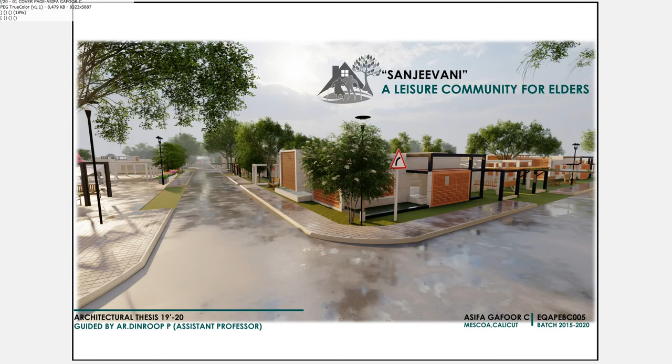Hi, this is Asifa Gafoor C. Here, I would like to present my thesis topic, Sanjeevani, a leisure community for elders.

This is basically a retirement community, which is away from the concrete jungles of the city. Sanjeevani has been specially crafted for the retirees to live an active, healthy life in the lap of nature and to explore the things which they couldn't do during their work life. Basically, this is considered as a second home for senior citizens who believe in living their golden years to the fullest.

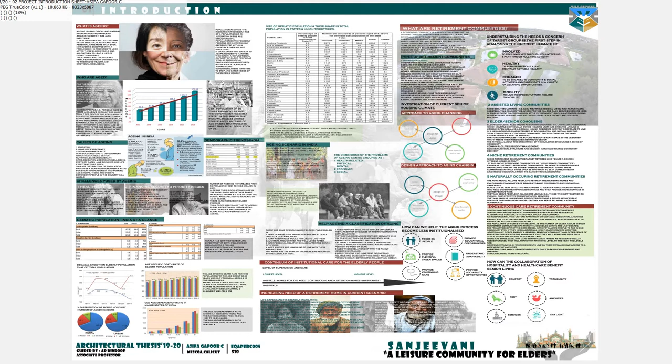Talking about the feasibility side of the project and why I have selected retirement communities as my topic. Since there is a hike of geriatric population in India, if we are checking the past 10 years population census, we can see that there is actually a high rise of geriatric population every year due to many reasons like high life expectancy ratio, the old age dependency ratio, and of course highly sophisticated medical facilities.

There are different types of retirement communities. Here, I intended to design a continuous care retirement community, which actually clubs independent living, assisted living, as well as 24-hour nursing home care.

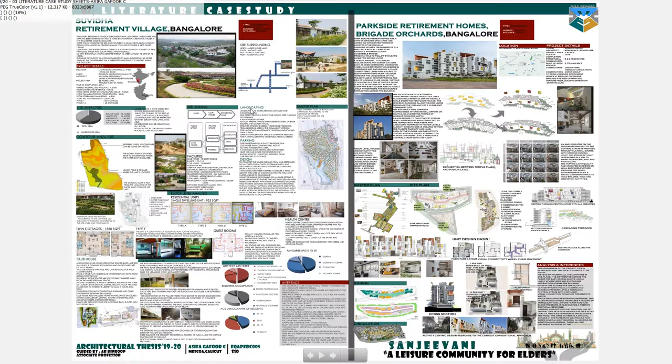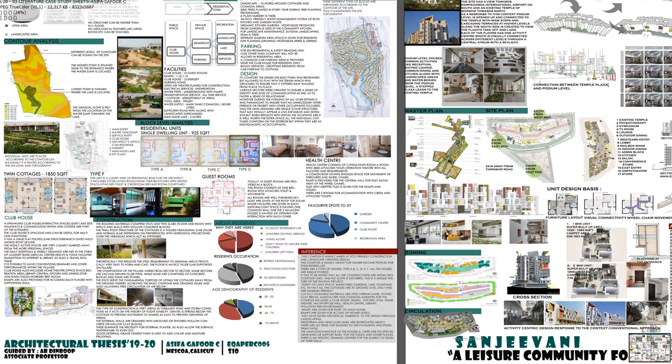Study part, I did 4 different case studies, 2 different literature case studies and 2 different live cases. Literature case studies being the Suvidha Retirement Village, which is situated at Bangalore, which covers an area of 27 acres. The complex is mainly aimed at eco-friendly construction and landscape-oriented design, in which all the individual units are placed according to the site contour levels.

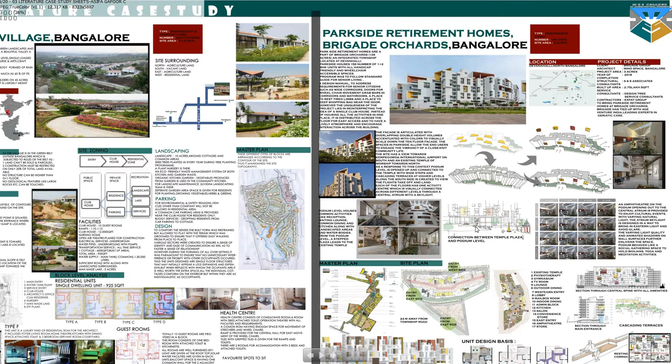The second being the Parkside Retirement Homes, which is again situated at Bangalore, which covers an area of 3 acres with a built-up area of 2.75 lakh square feet. The uniqueness of the project lies in reinterpreting the idea of a single clubhouse instead of housing all the activities in one place.

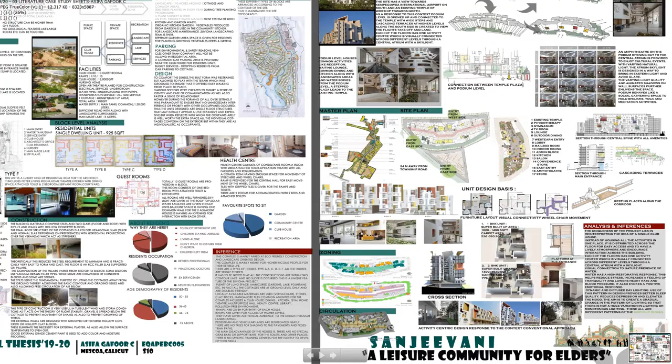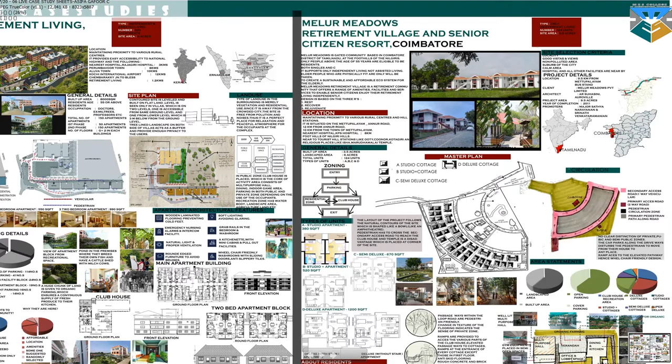The live case studies include the Blessed Retirement Living, which is situated at Aluva, Ernakulam, which covers an area of 3 acres, and Melur Meadows Retirement Village and Senior Citizen Resort, which is situated at Mettupalayam, Coimbatore, which covers an area of 9.5 acres.

I used this opportunity of doing live case studies for understanding some of the basic elements, which include the area requirements of the project, the proper zoning, the study of interaction spaces of residents, the evolved spaces, activity study of residents, the connection and the accessibilities, the residents' attitude towards space, the needs and aspirations of residents, etc.

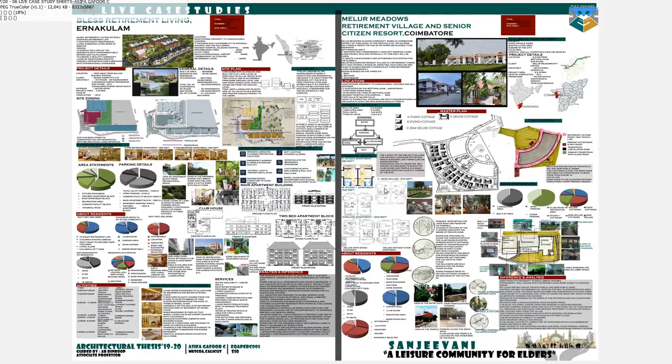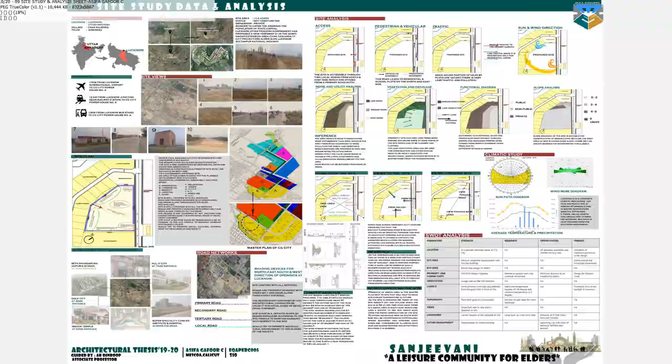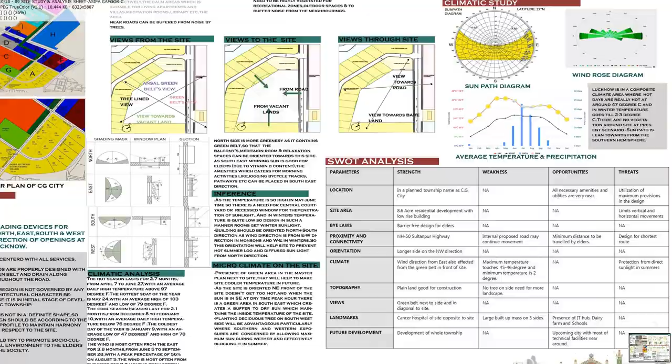Analysis. My site is at Lucknow, Uttar Pradesh. To be more precise, it is at Gomti Extension area. It is actually a part of township Chak Ganjaria C.G. City, which covers an area of 13.6 acres. Talking about the Lucknow climate, Lucknow lies in a composite climate area, which has a subtropical climate and faces extreme climate throughout the year.

Moving into design programming, space analysis, and design concept. Considering the end users being the elder people, a high density of older population is not good for cultivating personal attention and healthy social relationships, since old persons become more sensitive to be irritated by the negative status of others. Considering these factors, I have designed a retirement community for 120 elder people around Lucknow.

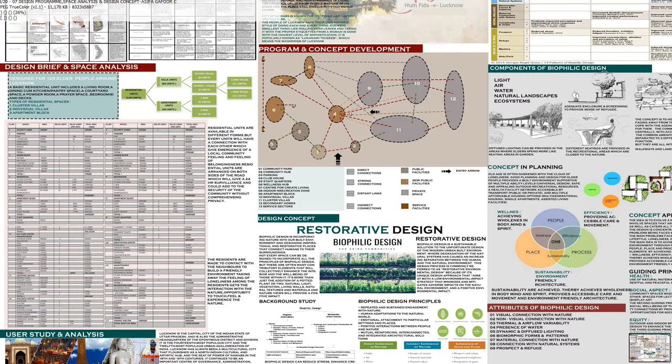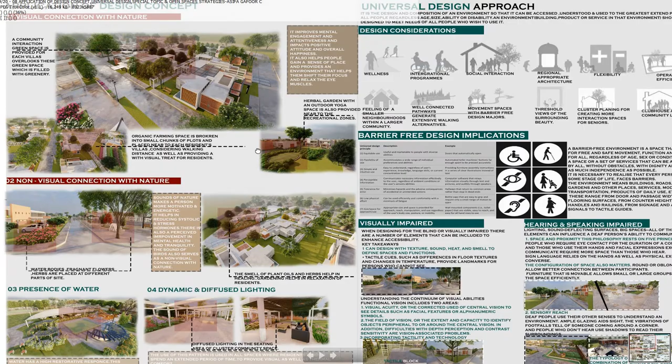Considering the psychological preference of the end users, I have divided the residential spaces into 3, namely cluster villas, individual villas, and apartment block. This is how I applied my biophilic design concept in my project, including visual connection with nature, non-visual connection with nature, connection with natural systems, prospect and refuge, bird free communities.

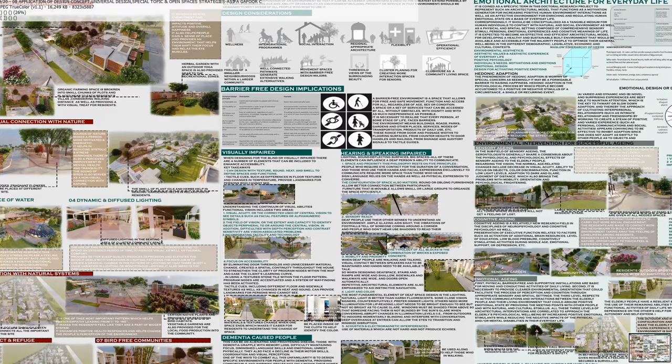My end users being elder people who are less able, my design should always be universally accepted design. So let's see how I have approached universal design and how I have included it in my project. I have also planned barrier-free design implications, which I mainly break down into 3 environments, including visual environment, hearing and speaking environment, and dementia caused people.

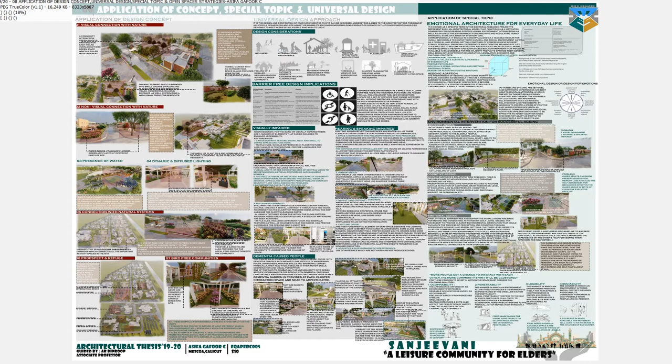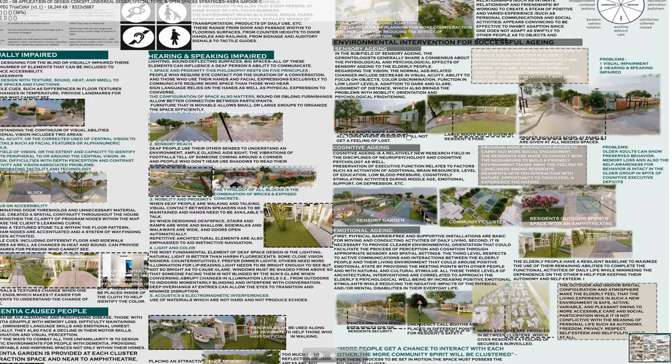Moving into application of special topic, which is emotional architecture for everyday life. It represents an architectural model that functions as a motivation generator for increasing positive human-environment interactions, as well as an effective environment for enriching and regulating human emotional state on the basis of everyday life.

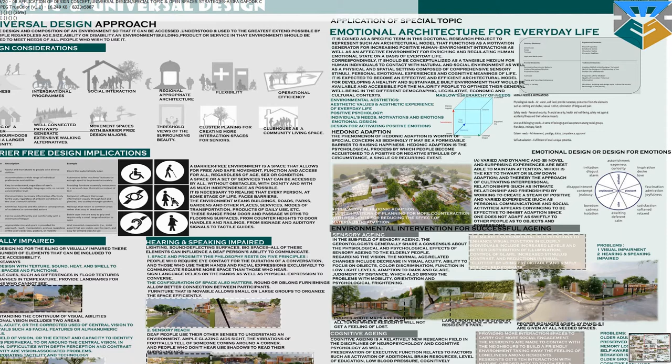Hedonic adaptation is the psychological process by which people become accustomed to a positive or negative stimulus of a circumstance, a single or recurring event. And here, there is a high chance of the elder people being subject to hedonic adaptation. The design should always be varied and dynamic. Moving into design of senior friendly spaces.

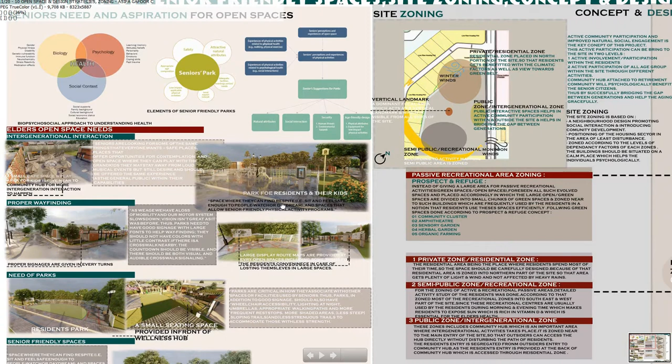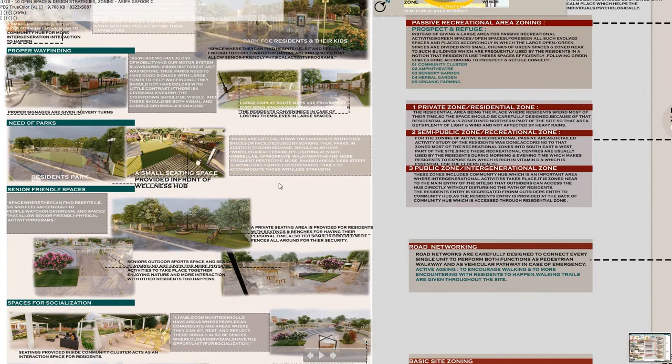People get emotional attachment to places other than their home, which are referred to as third spaces. Older adults are more likely than younger adults to have lived in a single space for a long period of time and consequently feel more attached. If parks and other open spaces are part of the third spaces for community elders, they can help them develop a positive connection to their surrounding environment and feel part of their community.

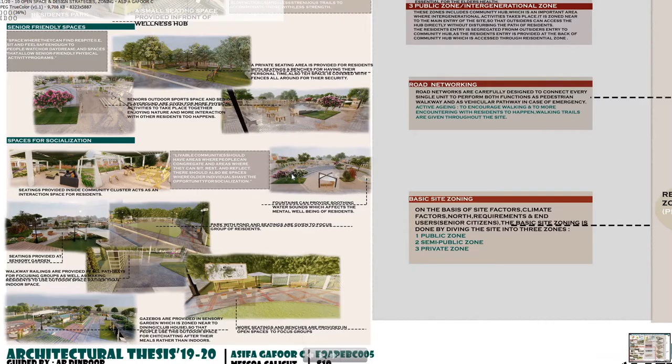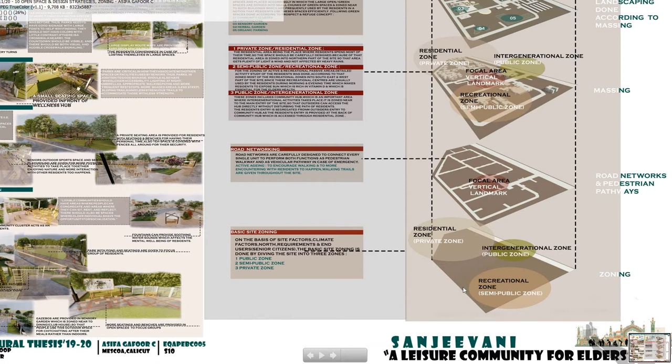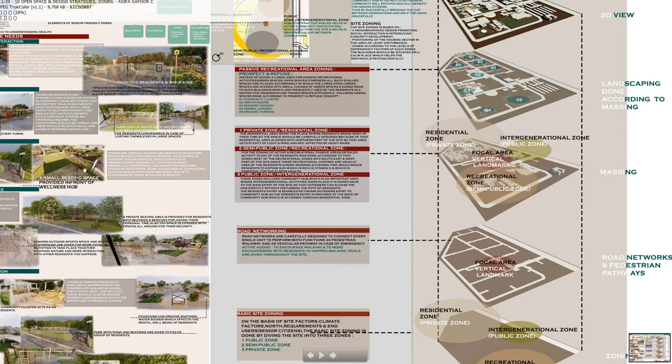The zoning is on the basis of site factors, climate factors, direction, requirements and end users. The basic site zoning is done by dividing the site into three zones: public zone, semi-public zone and private zone. Then all the road networks are carefully designed to connect every single unit to perform both functions, as pedestrian walkway and as vehicular pathway in case of emergencies. Then comes the detailed zoning.

The residential area is the place where the residents spend most of the time, so I have wanted it in such a way that the residents are benefited. So the residential area is zoned into the northern part of the site so that they get plenty of light and wind and are not affected by heavy rains.

After the residential area, the residents spend most of their time at active and recreational centers. So for the zoning of active and recreational areas, I have done a deep activity study of the residents. According to that, I zoned most of the recreational zones into the southeast and southwest part of the site, since recreational centers are usually used by the residents during morning and evening time, which exposes these residents to sun, which is rich in vitamin D and essential for the elders' health.

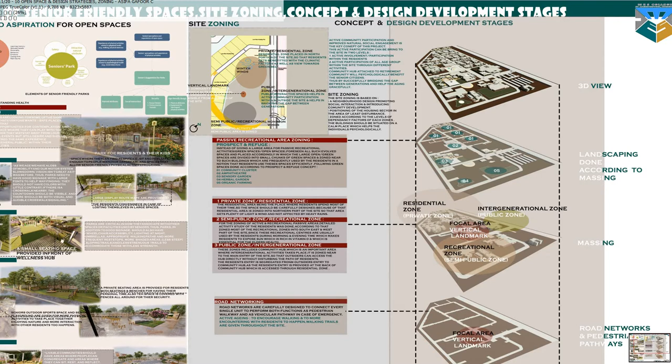The intergenerational center, including the community hub, is placed in the public zone, which is an important area where intergenerational activities take place. It is zoned near the main entry of the site, so that outsiders can access the hub directly without disturbing the path of residents. The vertical landmark in such a project is very important for the perceived security of less able people.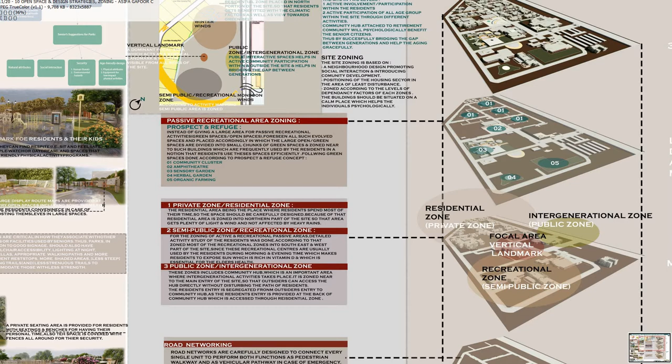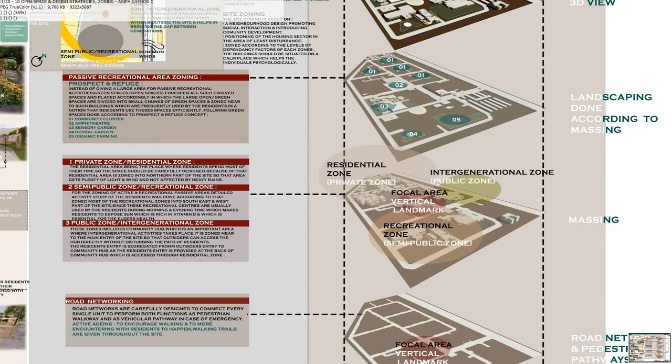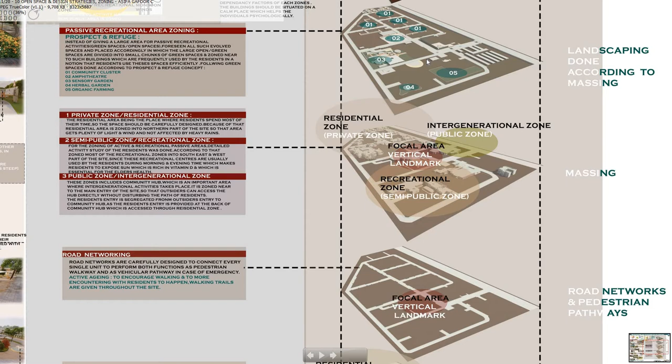Extensive care is taken while designing passive recreational activity spaces. Instead of giving a large area for passive recreation spaces, I have foreseen all such evolved spaces and placed them accordingly, in which the large open or green spaces are divided into small chunks of green spaces and zoned near buildings which are frequently used by the residents, so that the residents use this space efficiently.

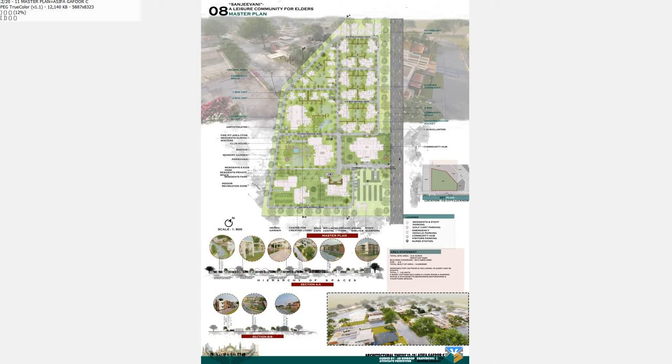Talking about spatial planning, my primary focus was to create more interaction spaces and more opportunities for residents to interact with each other, and to include ample green spaces so that they spend most of their time outdoors rather than sitting indoors. The site abuts the road on its northeast and northwest side. The main entry is through the northeast entrance. All the residential areas are zoned into the northeastern part of the site.

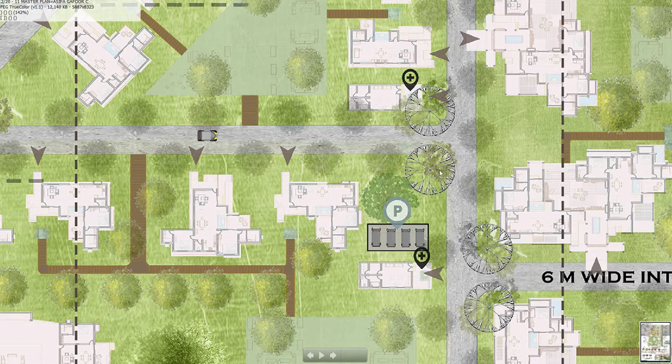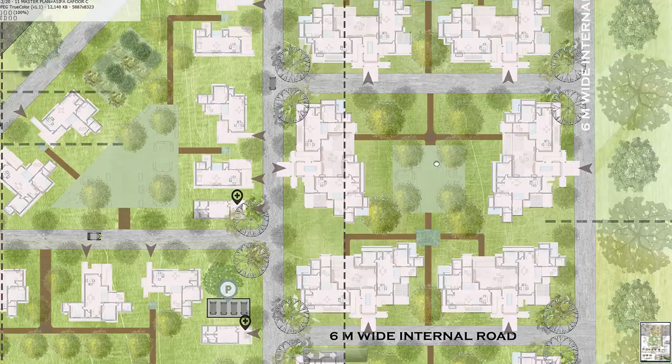These spaces include cluster community villas, individual villas, an apartment block, then a nurse station in between the villas for 24-hour surveillance of the residents, then electric vehicle parking areas, then a secondary home which is zoned at the end corner of the site. The secondary home is basically a place for residents' children to stay. All the residential areas are connected by community interaction spaces either at their center or nearby.

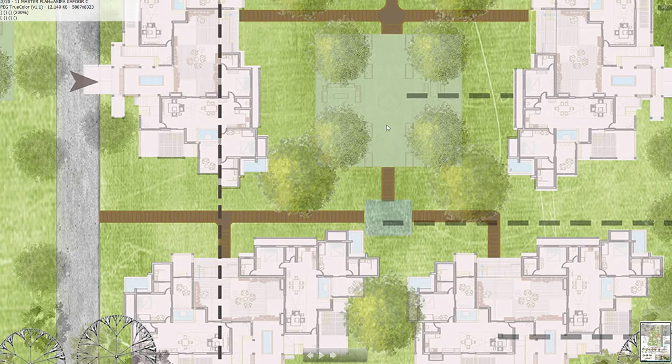Actually, a hierarchy of spaces takes place here. That is, two cluster villas are connected by a central deck space, which is connected by a green corridor space to a small neighborhood pocket space. This small neighborhood pocket space is connected by two green corridors of neighborhood cluster villas. Then it is further connected to a larger community space.

All large activity areas in the site are highly connected to each other, so that a person standing at one end of the activity space is visible to a person standing at the other end of the space, as visual surveillance is very important for both real and perceived security outdoors, especially for the less able.

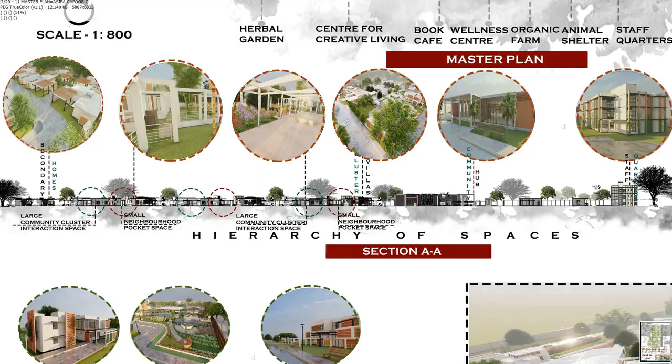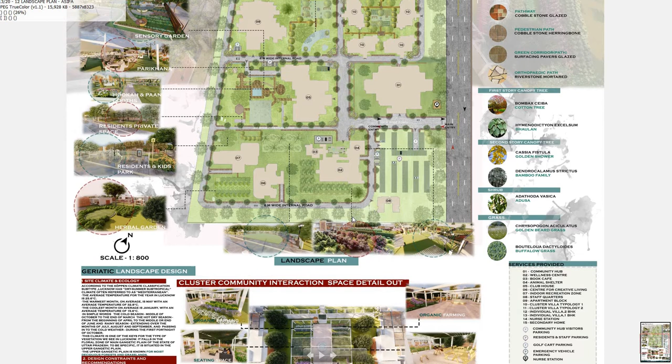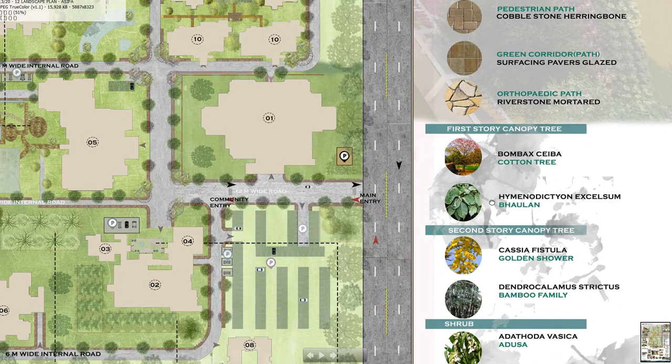Moving into Geriatric landscape design. According to the Köppen climate classification subtype, Lucknow has a dry summer subtropical climate referred to as Mediterranean. The climate is one of the keys for the type of vegetation which we see in Lucknow. It falls in the floral zone of the main Gangetic plain of UP, to be more specific, the upper Gangetic plain, which is known for its moist deciduous forests and grasslands. Considering the native ecology of Lucknow, I have gone for a landscape which is a mixture of woodland and grassland.

Talking about the services, on the basis of the water capacity, I have provided an overhead tank on the apartment block as well as a pillar water tank which is situated near the apartment block.

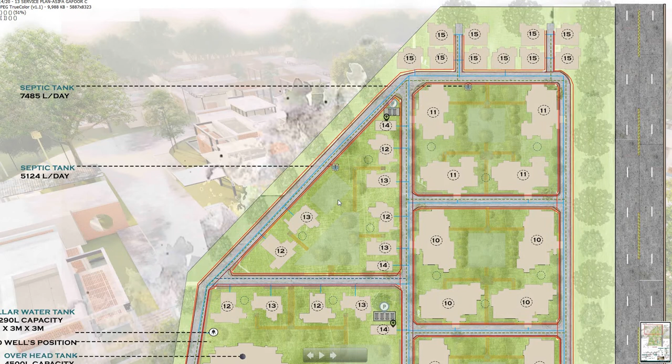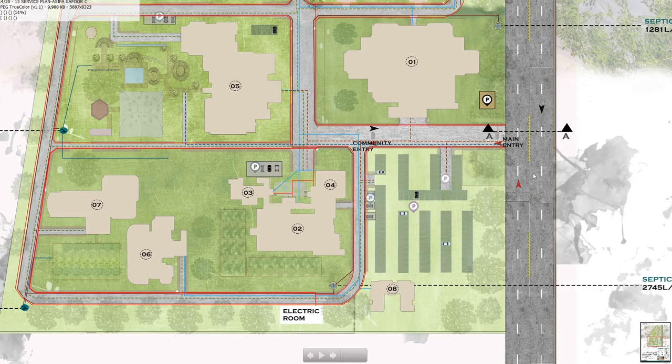On the basis of number of users as well as the capacity of the tanks, four different size septic tanks are provided in different parts of the site, which all are interlinked and then connected to the sewage treatment plant. STPs are then connected to the outer drainage, in which the natural slope of the site is towards the northeast side. If I'm taking a section like this, this is how I'm planning to take all my cables through into the site. These are the design of prototypes.

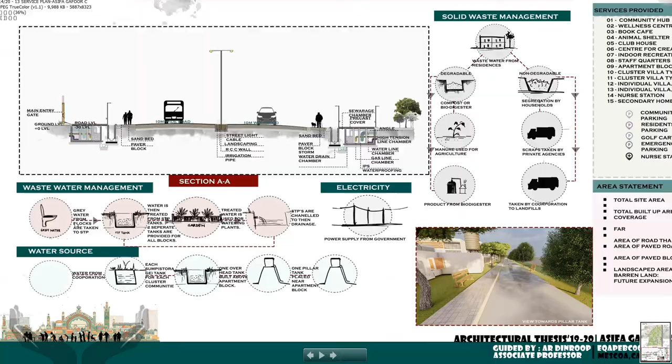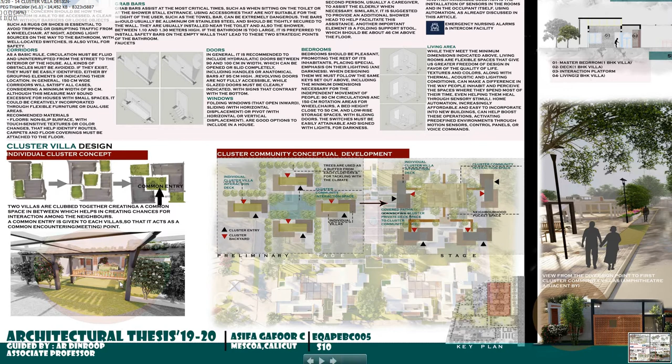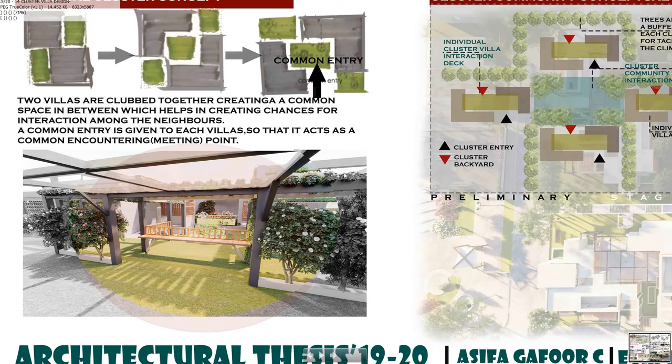It's talking about the cluster villa design concept, in which two neighboring villas are clubbed together, creating a common space in between, which helps in creating chances for interacting among the neighbors. I have provided a common entry point to each villa, which acts as a common encountering or meeting point between the residents. This is how I have conceptually developed the cluster villas.

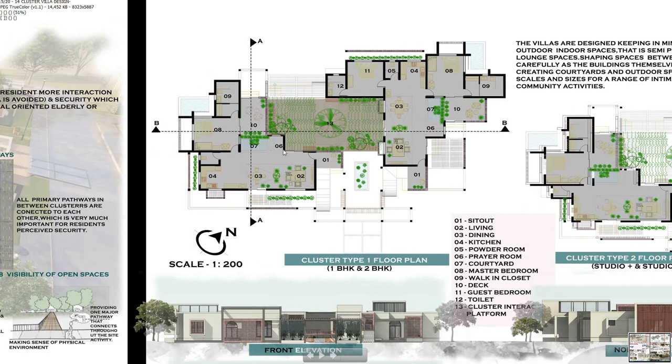There are two different types of cluster villas, in which one includes 1 BHK and 2 BHK villas, and another cluster community includes studio plus and studio villas. All clusters have an interaction deck at the center, which connects both the cluster villas together and acts as an interaction space for the residents. This deck is accessed from the living areas of both the villas.

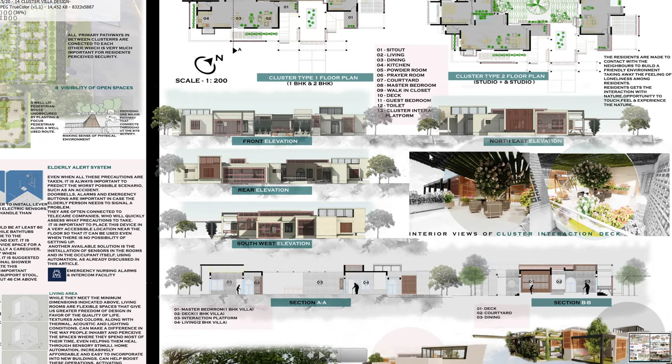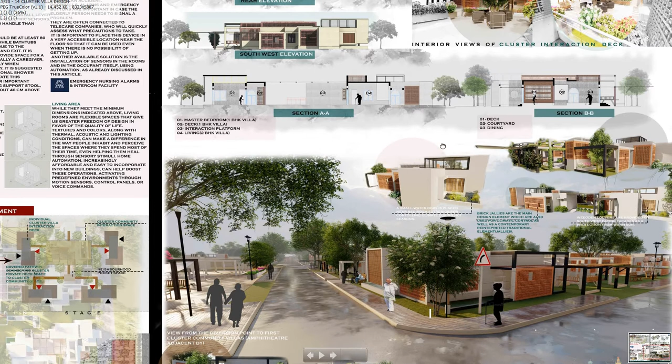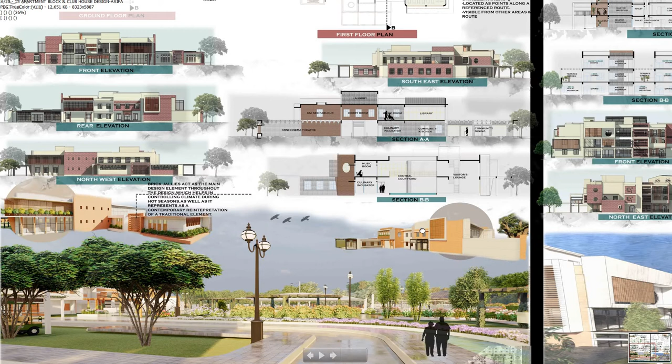The villas are designed keeping in mind the requirement of outdoor-indoor spaces, that is, semi-public and private lounge spaces. Buildings themselves are shaped, creating courtyards and outdoor spaces of various scales and sizes for a range of intimate to community activities. Recreational and residential prototype. The clubhouse includes all the recreational activities, which are sorted out according to the needs of elders.

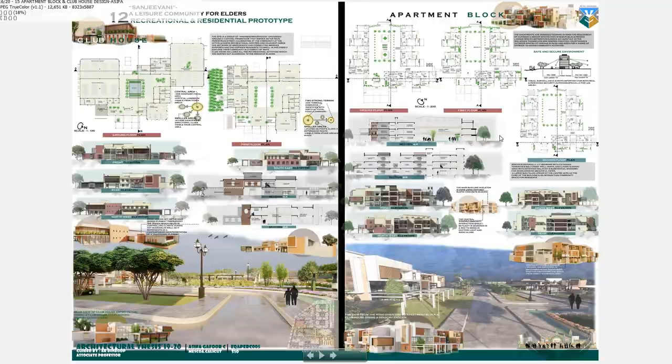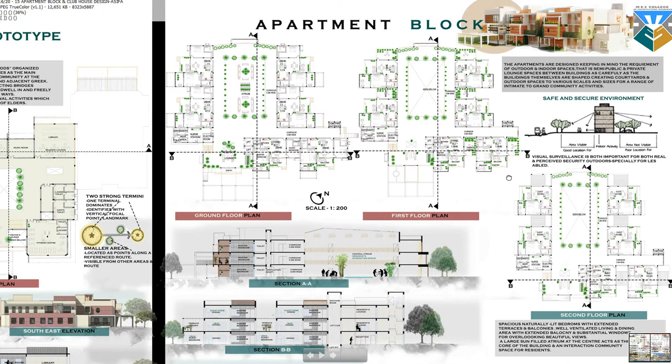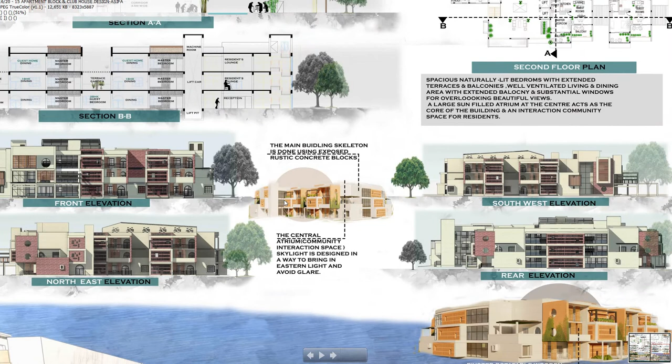The apartment blocks are designed keeping in mind the requirement of outdoor spaces and indoor spaces, that is, semi-public and private lounge spaces between buildings, as carefully designed as the buildings themselves are shaped, creating courtyards and outdoor spaces of various scales and sizes for a range of intimate to grand community activities. A large sun-filled atrium at the center acts as the core of the building and as an interaction community space for the residents. Moving into intergenerational and recreational prototype.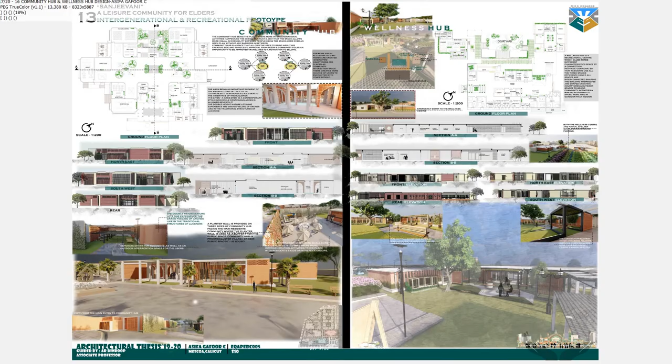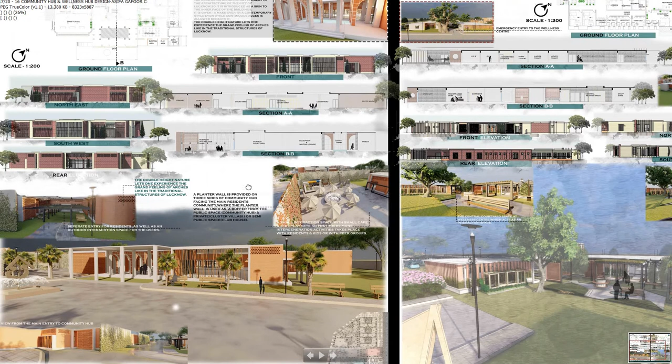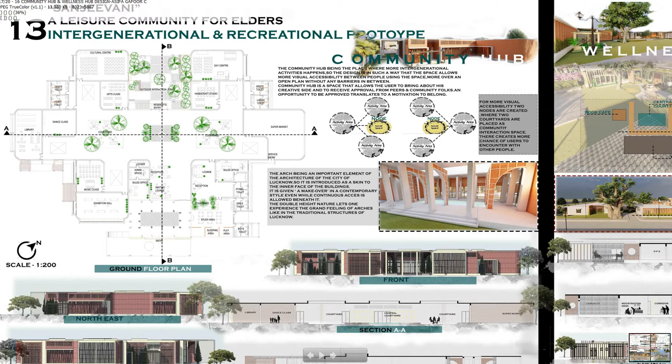The community hub being the place where more intergenerational activities happen, the design is in such a way that the space allows more visual accessibility between people using the space, moreover an open plan without any barriers in between. For more visual accessibility, two nodes are created where two courtyards are placed as community interaction space.

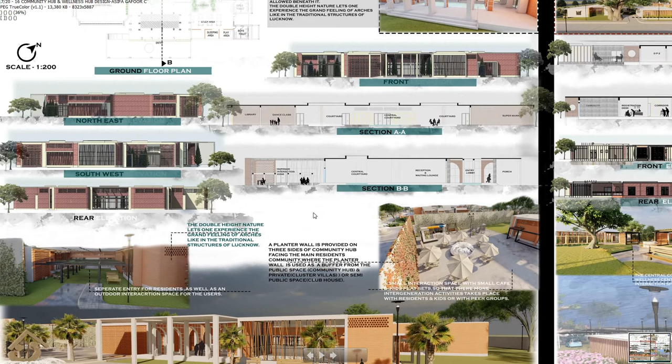The arch being an important element of the architecture of the city of Lucknow, it is introduced as a skin to the inner face of the buildings. It is given a makeover in a contemporary style even while continuous access is allowed beneath it. The double height nature lets one experience the grand feeling of arches like in the traditional structures of Lucknow.

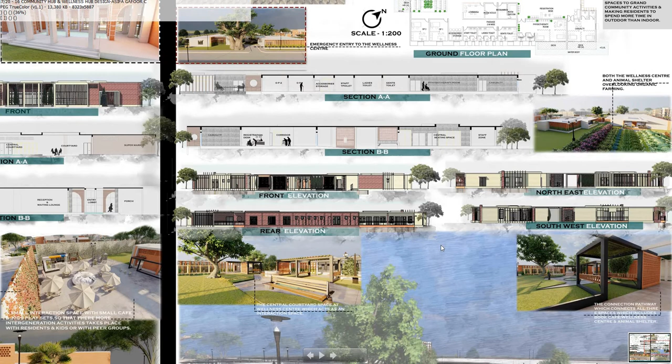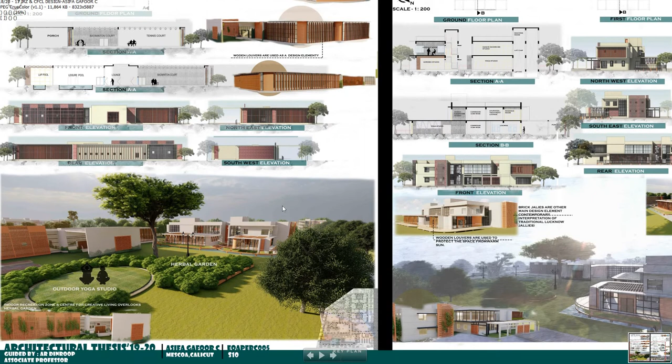A wellness hub is a recreational center which clubs three different characteristic spaces by a connection pathway or corridor, so that residents use all three spaces efficiently since all spaces are interconnected. Moving into again recreational prototypes. The indoor recreation zone houses all the indoor sports and recreational activities. A common recreation center is provided for all people staying at the independent as well as assisted living, so that they can have their activities done and enjoy their day-to-day activities in comfort.

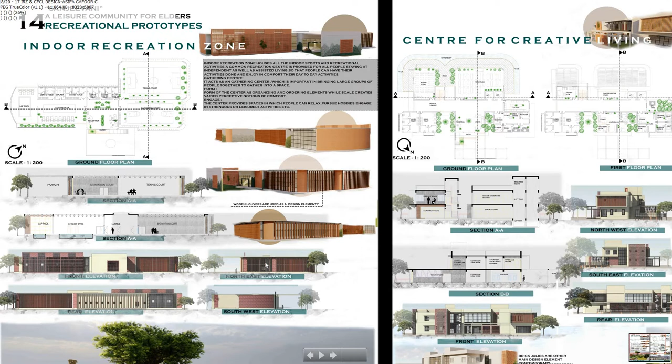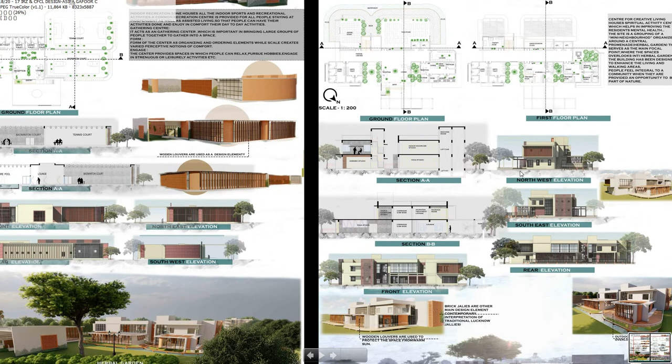The Center for Creative Living houses a Spiritual Activity Center, which helps in improving the residents' mental health. The site is a grouping of a mini neighborhood organized around a central promenade herbal garden that serves as the main focal point, where the spaces overlook the herbal garden. The building has been designed to enhance the living and walking areas. People feel integral to a community when they are provided an opportunity to be a part of nature.

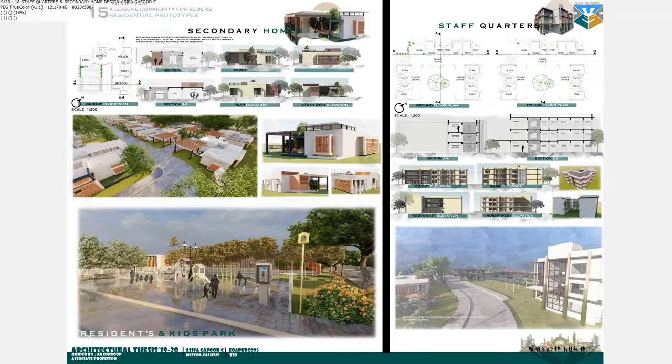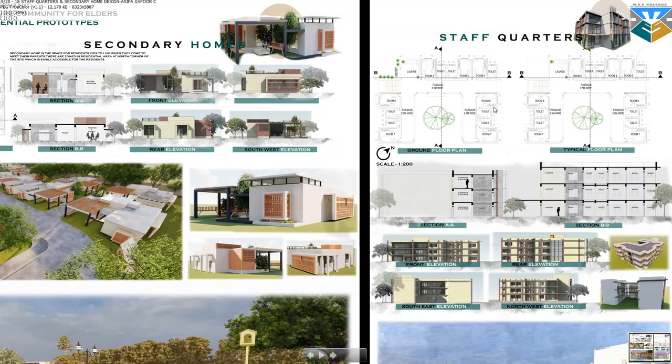Finally, the residential prototypes. Secondary homes are the spaces for the residents' kids to live when they come to meet their parents. These spaces are zoned in the residential area at the northern corner of the site, which is easily accessible for all the residents. Residents' and kids' parks are also provided on the site. A staff quarters is also provided for the resting purpose of the staff, which is located at the corner of the site.

Through this project, I have tried incorporating all architectural innovations which are correlated to approach the elders' psychological well-being by increasing positive emotional stimulants while reducing the negative impacts of physical or mental disabilities in their everyday life. So that's how I carried out the project throughout.